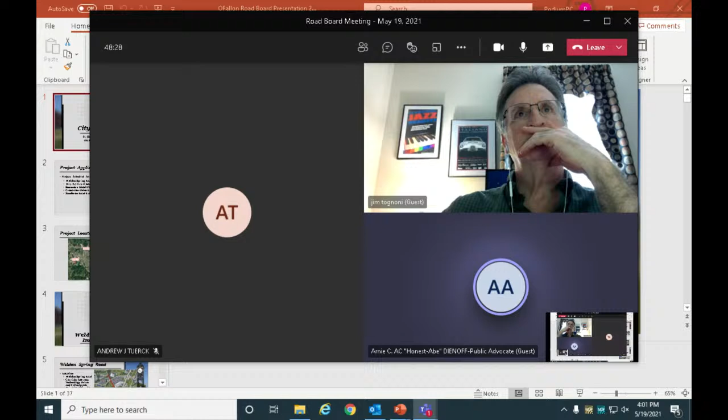And Mr. Dienoff is on the phone and should be able to speak. Yes, I can. Okay. Thank you very much, members of the Road Board. My name is Arnie. I'm a public advocate. And I just want to go through a few issues. One with the current project and the second one with some of the presentations this afternoon.

The first one I'd like to bring up to the Road Board is Missouri Highway N and East Road Construction Realignment Project. I'm not sure the scope of that project is actually being followed. The contractor has broken up the pavement, but has left the pavement there broken up and has basically kept the job. There's questions about workmanship. There's been some pieces of new asphalt that are already popping up.

It's dangerous as the subcontractor has left it. It's down to very narrow lanes and bad striping methods have been used. Someone should be very concerned from the county and from MoDOT. We should be embarrassed by the conduct and the lack of work quality by the contractor. And I would ask members of the road board to ask some questions and look into this issue.

The next issue is the city of O'Fallon, who will make a presentation this afternoon. I am in favor of correcting and making the safety improvements to Weldon Spring Road curve. This should be a joint project, not only the city of O'Fallon, but also the city of Dardenne Prairie, and also the unincorporated county department of highways. This really has been neglected and really needs to be fixed because of the influx of residential developments.

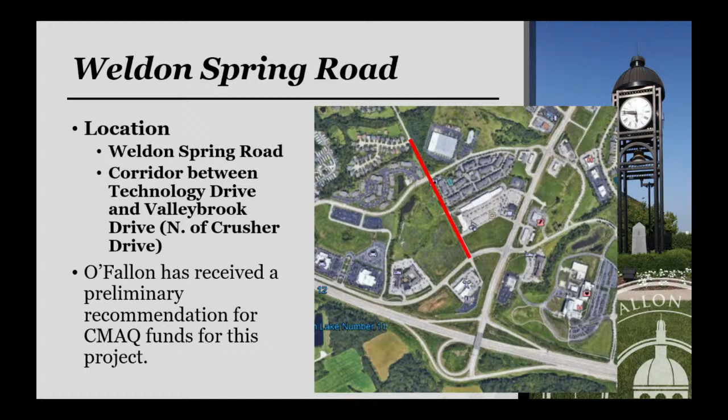Just as an aside, we have applied for and have received preliminary approval for CMAQ funds for this project as well. But essentially, there's a high-density residential development that's going to be occurring on the corner of this particular roadway.

We anticipate that further development will take place shortly thereafter once this comes in, and that's going to increase the traffic loads on this roadway. The existing roadway is in kind of a deteriorated condition, and the existing sidewalk is not in compliance with some ADA standards. It also just kind of stops in the middle of nowhere.

So what we'd like to do is basically install a new 3-lane, 39-foot wide concrete pavement cross-section and adjusted profile for this stretch of roadway. Install a new roundabout at the intersection of Crusher and Weldon Spring Road, and then make some improvements to the pedestrian system, extend those sidewalks, and basically make a complete system so that residents in the area can then access some of the commercial spaces there along Highway K near Highway 40. And last would be to install high-visibility crosswalks where applicable.

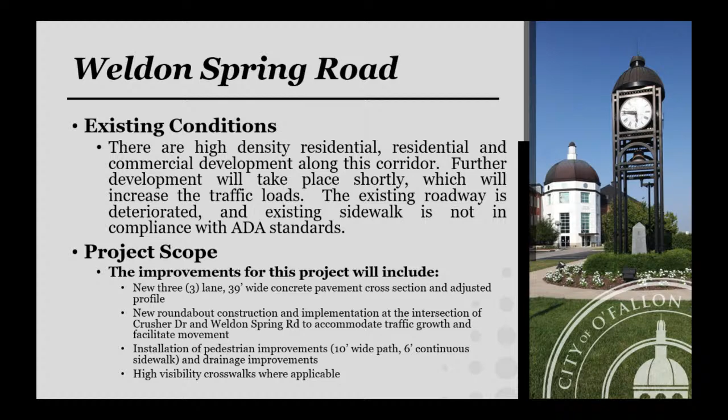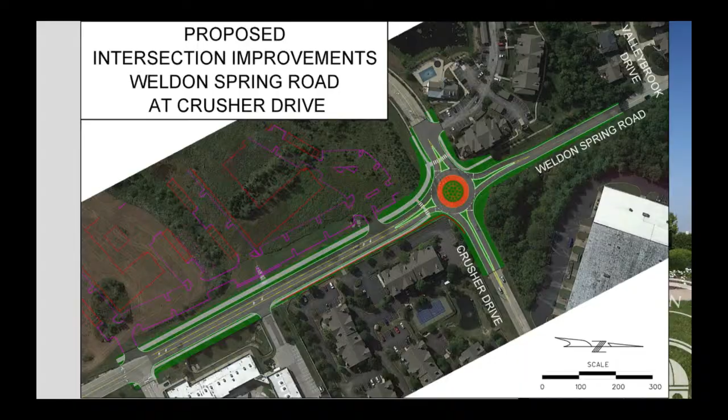How high is the density there? It's several apartment buildings. I don't recall exactly how many new residents it would be, but it's high-density residential. It's not single-family developments. Again, here is just another concept plan for the developer.

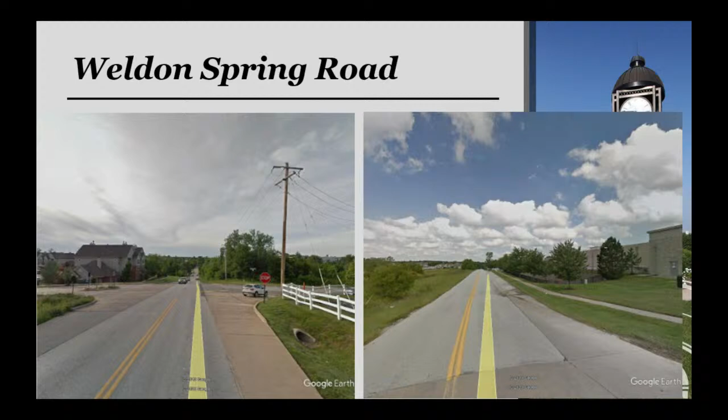Here are some pictures of the roadway, so you can see it kind of transitions from concrete to asphalt, and it's kind of broken up in places. The sidewalk just kind of stops, just kind of a disjointed little intersection, and right now it's stop controlled. And again, as more and more traffic gets placed on that roadway, we can see where that congestion is only going to get worse and worse.

So in terms of funding, we are looking at around $2.66 million for this. Again, we have CMAQ funds that were going to be appropriated for this project as well. We have preliminary approval for that. And basically that accounts for 39.19%. With CMAQ, there were some limitations on the entire project of what could and couldn't be funded. We got the maximum amount of this project funded as possible with CMAQ. We are asking that, between the county and city, we basically make up the difference of those funds. But there's a summary of that.

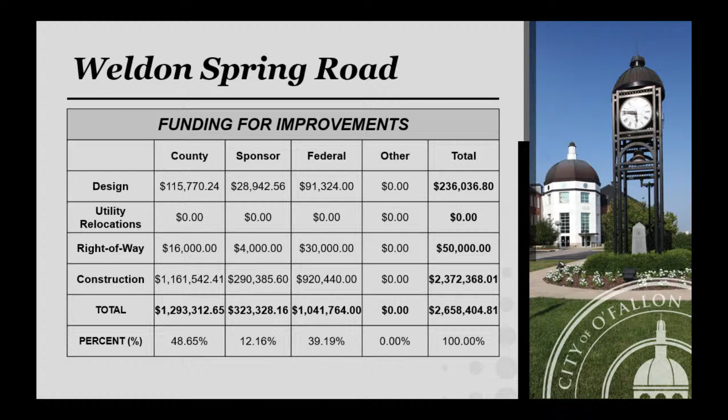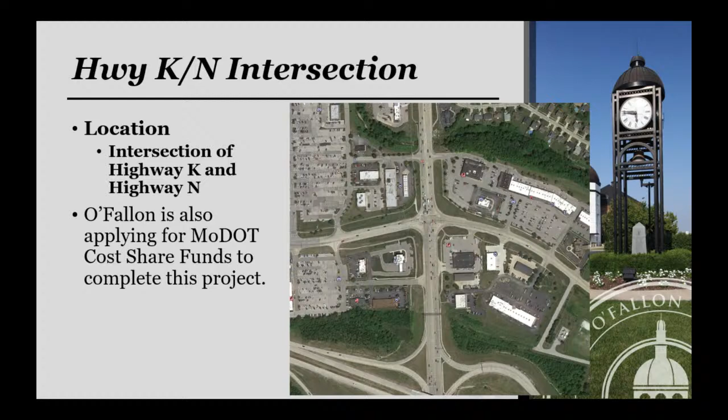The second project is the Highway K and Highway N intersection improvements project. So we have applied for MoDOT cost share funds on this. I've submitted an application. I think the next cost share meeting is in July, maybe? I think that's right. So got a little bit to go, but we have applied for additional funds for this as well. This project would be centered around, obviously, the intersection of Highway N and Highway K. If anybody has driven through that area, it is a nightmare on most days.

We completed a citywide traffic study back in 2018, and this, along with the Highway K 364 intersection, were basically the two lowest performing intersections in the city in terms of level of service. High level of delay in the morning and in the afternoon. Traffic backs up pretty substantially.

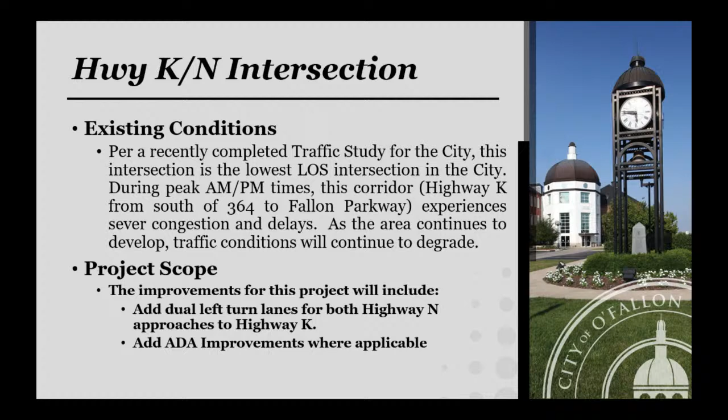So, in speaking with MoDOT, because obviously Highway K, Highway N, and 364 are on the MoDOT system, what we came up with as a sort of coordinated effort would be to add dual left turn lanes for both Highway N approaches onto Highway K, and then also add some ADA improvements where applicable. And here is kind of a concept plan for this.

The idea behind this is that between the 364 interchange and the Highway N interchange, obviously there's a lot of straight through movement on both of those. There isn't a ton that we can do to the 364 interchange. However, the Highway N interchange is starting to see more and more traffic, especially coming westbound and turning. And right now there's only single dedicated left turn lanes.

So the idea here is that by adding dual left turn lanes on both approaches, you can get more cars in the turning movement while keeping the turning movement timing the same, and then potentially expanding the straight-through movement to help move more traffic in the straight-through movement, which is currently the issue. So, like I said, in a joint effort, that's one of the concepts that we came up with, and we're pursuing that as a project.

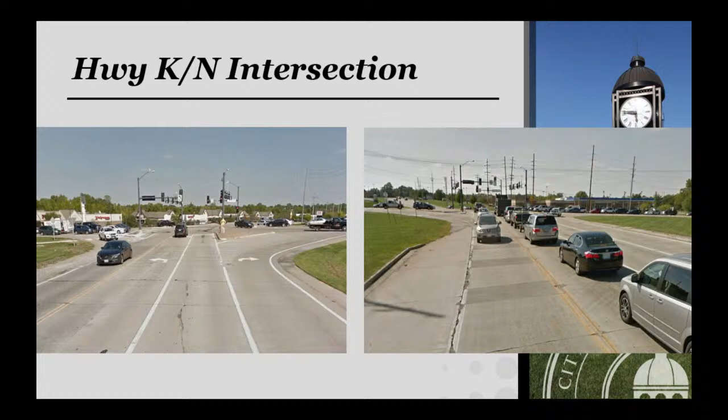So, again, here you can see some photos of it. AM, PM, peak hours, it's an absolute nightmare to get through there. So, it is a $1.3 million project.

We have applied for 50% cost share funds through MoDOT, and then we are looking for an 80-20 split of the remaining 50%, or a 40-10 split between the county and city to do this project.

Third project is the Sommers Road widening. So this is Sommers Road between Highway N and Highway DD. And what we have is Sommers Road is essentially a 3-lane road starting at Highway N and coming down to Discovery Ridge Elementary School. At that point, it necks down to 2 lanes and then goes down, and actually the City of O'Fallon just completed a project to install a signalized intersection at the Sommers Road and Highway DD intersection.

As part of that, we widened it out to 3 lanes because there's a dedicated left turn lane. However, there's going to be this little portion of about 400 feet where it's going to be 2 lanes. So it's going to go 3 lanes down to 2 lanes for about 400 feet and then widen back out to 3 lanes. We also have a development that's going to be coming in on the northwest corner there, the Sommerline development. They're going to be making improvements as part of it, but basically, as a result of where their improvements lie, there's still a 400 feet gap.

So what this project would seek to do would be to widen that remaining portion of Sommers Road out to 3 lanes, so it's 3 lanes the entire way from Highway N down to Highway DD. Along with that, there are some sidewalks that kind of stop and start along that route that need to be filled in, so that, again, there's 3 schools within half mile of each other. So it's very important to get that pedestrian facility completed. That way, all of those homes and all those residents in that area can use those, kids can walk to school, et cetera.

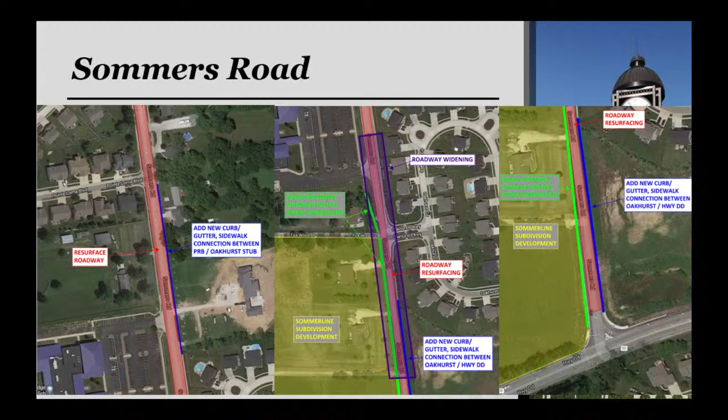So we'd like to resurface the roadway, add some sidewalk in some places, widen the road for that 400 feet stretch so it doesn't kind of neck down and go back out to 3 lanes, and basically just make some general improvements to the area. So this, we estimate, is a $1.7 million project, and we are looking for an 80-20 split between the county and the city to do this project.

On that one, what is the breakdown if you eliminated the resurfacing of the other road other than that 400 feet? I would have to go back and check. I apologize. I believe there's an estimate that was included with this that itemizes those items, but I don't have it in front of me, but I can get that information for you if you would like. What do you think's driving that right-of-way cost? It doesn't seem like you're really impacting that 400 feet as far as expanding the road, or?

So, yes, there would be some right-of-way costs associated with, just to the north of that Sommerline development, in between that and Discovery Ridge Elementary School, there's 2 properties that we would have to get a decent amount of right-of-way for to expand the road to 3 lanes. Also on the other side, you could potentially expand it in both directions, but then you're going to be getting into people's front yards and backyards. So we put that in. It may not be that bad, and there's also going to be a lot of easements to do the sidewalk work and everything else. So it's an estimate.

It may not come to that, but during the Highway DD and Sommers Road signalization intersection project, there was, how do I put this politely? There was a lot of disagreement about the right-of-way on that particular project, and we had to go to condemnation, and it didn't go so well. So we just want to make sure it's there just in case. Is your Sommerline development contributing any right-of-way or funding for this? Yes, they would be. They would be doing improvements to their side of the roadway as well as, I believe, contributing some right-of-way.

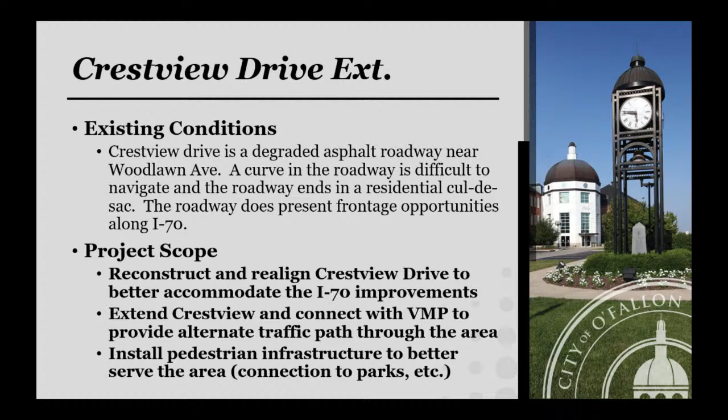And then again, also install some pedestrian infrastructure to better serve the area. Fort Zumwalt Park is right in the area. It would be nice for us to be able to connect a sidewalk because it does serve quite a few residents in the area as well. Here's a concept plan, so you can see it makes this real awkward, more than 90-degree turn, kind of a hairpin turn there around the corner. Again, it services a few commercial properties and then turns another 90 and then dead ends in that current cul-de-sac. This would extend that to the west and then eventually make a connection with Veterans Memorial via roundabout. We would also be installing sidewalks and everything else along with that.

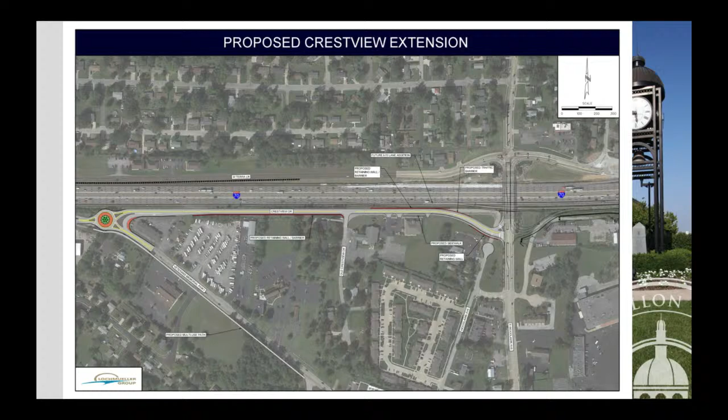And then this would also make a better, more direct connection with Woodlawn, which would hopefully help to better serve some of the improvements to I-70 that are going on in that same area. So this would be what we are proposing to do. Again, here's the old TikTok shop. I believe it's been torn down for a little bit, but again, the road's not in great condition. It is not necessarily very well used at this point, but we feel with the realignment, it could become a viable alternative to help traffic move through the area and onto the I-70 system a little bit quicker than what they currently have to do.

So for design and right-of-way, we currently estimate this to be about $620,000. And we are looking for an 80-20 split with the city and county again. Purely design and right-of-way at this point, no construction funds.

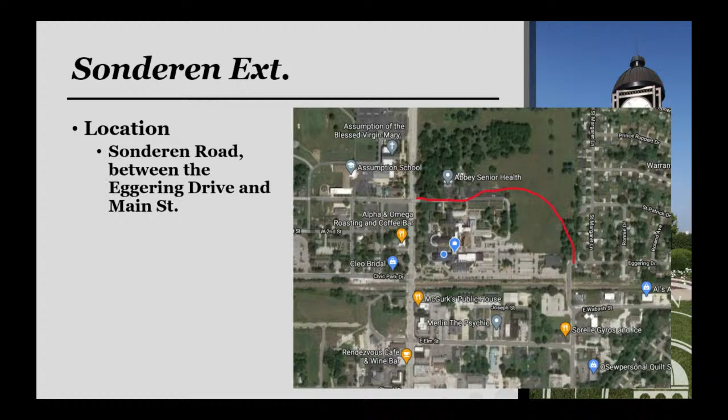And last but not least is the Sonderen Road extension. This would be extending Sonderen Road where it currently terminates at Eggering Drive and making a connection onto Main Street at the Main and 3rd Street intersection. There is a development that is planned in the area. It is the old Sisters property, and that is going to be coming in as a mixture of high-density, single-family residential, commercial, and a few other things. It's a very large development, and it's going to put a lot of traffic in the area. So we believe that this necessitates a connection between Sonderen and Main Street. We hope that it allows for greater connectivity, and we'd like to see Sonderen become a better utilized street as kind of a sister to Main Street through the area.

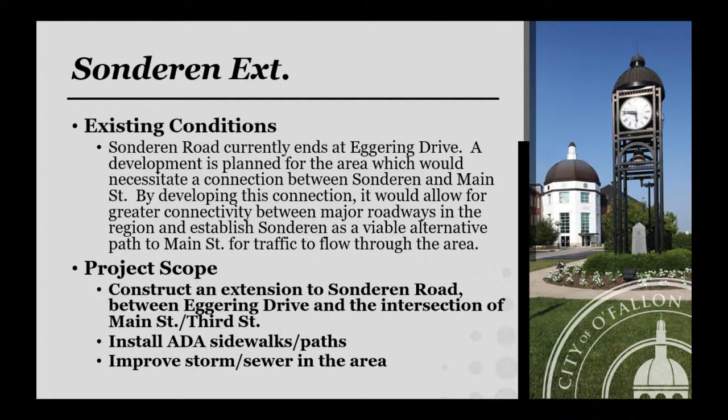So what we would want to do is construct an extension to Sonderen Road between Eggering Drive and the intersection of Main, and install ADA sidewalks and paths. We have a 10-foot path on one side, a 6-foot path on the other, and then also improve some storm and sewer in the area. So again, this is a concept plan. Where Sonderen currently terminates is on the bottom right, and then the intersection with Main Street would be on the middle left, and you can see what's going to happen.

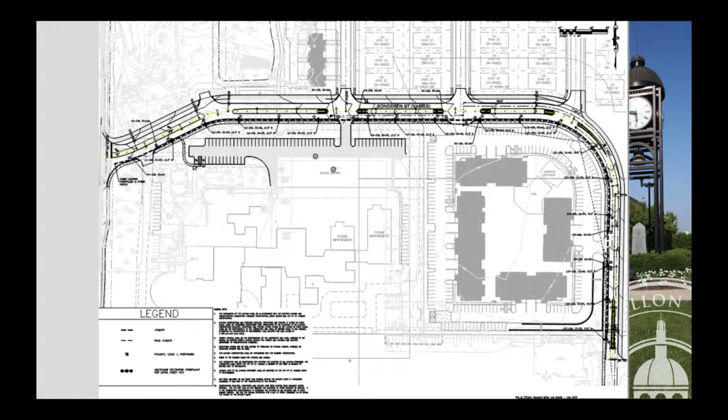So we have some high-density apartment-style residential dwellings that would be constructed on that corner where it rounds, and then you'd have more residential development up on the top, as well as some new commercial frontage along Main Street. The existing Sisters property essentially stays in place. There are some modifications to it, but for the most part, it remains untouched in terms of still maintaining its senior care and everything else associated with that facility. So again, here's where it currently terminates. We would go directly north from this and then around the bend and then eventually make the connection out onto Main Street.

We do have, again, as part of a development, kind of a partner in this one with a developer. They will be putting up the funds for design and donating the right-of-way. What we are essentially asking with this is to split the construction costs, 55% county, 10% city, 35% developer. You can see what the total percentages are if you factor in the design and the right-of-way that the developer is taking care of. We estimate this to be about a $2.7 million project at this point in time.

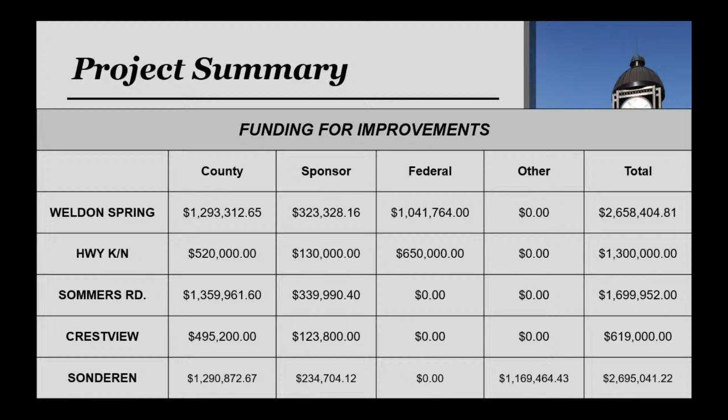So here is a summary of the funding that we are looking for in terms of the county, the city, and the other agencies. Again, we have two, hopefully, federal partners on 2 projects and then a developer on the Sonderen project contributing additional funds.

How far along is the developer? Is it pretty much set in stone now for that property to develop, or is this still concept phase? Again, I'm not on the development side of things for the city, so I cannot speak to exactly how far the conversations are, but from what I gleaned, it's really far along to where it would be, I think, surprising if it fell through at this point. That's probably how I would answer that question, without being able to say for 100% certain, because I'm not a part of those conversations.

In terms of priority, what the city would view as its number one priority would be the Highway K, Highway N intersection improvements. Again, it's the worst performing intersection in the city. It affects almost 60,000 vehicles a day. So that is a huge priority for the city, to get that one performing better.

Second would be Weldon Spring Road. Again, we've preliminarily been approved for CMAQ funds for that project as well. Third would be the Sonderen Road extension. Fourth would be Crestview Drive design and right-of-way, and fifth would be the Sommers Road widening. And with that, I will take any questions you have.

I do. On the K and N section, has the Page extension relieved any of that at all, being able to get on and off there? When you say relieved, what do you mean? Well, I used to work over at K and N. I had an office over there, and it did back up quite a bit in the evening, especially. With the Page extension, people taking it and not necessarily having to go down Highway N, has that relieved any of that backup?

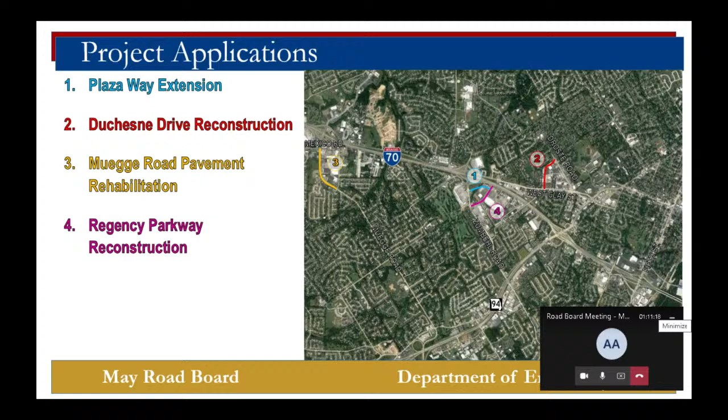All right. The City of St. Charles this year is applying for 4 different road projects. We recently received some great word that we were successful with federal funding on 2 of these 4 projects. For the Duchesne Drive Reconstruction, we received federal STP funds, and for the Muegge Road Pavement Rehabilitation Project, we also received federal funds. We'll get into that a little more on the specific project applications.

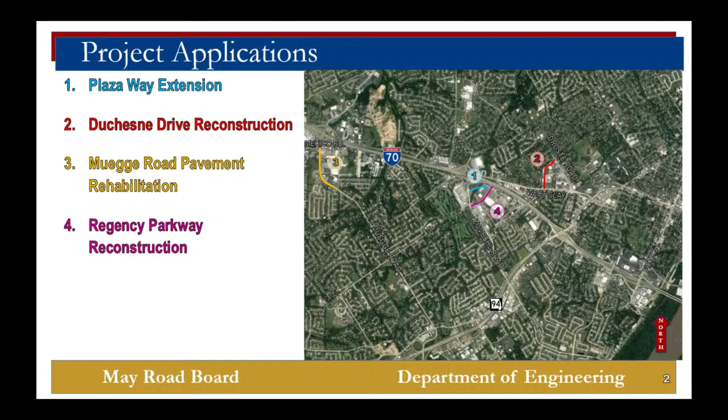But to jump right in, the first project that we have this year is the Plaza Way Extension. Every year, the City of St. Charles has a roadshow meeting where we try to highlight road projects and get feedback from the general public on what residents want to see. You'd think you'd see questions about roundabouts or other transportation stuff.

The most common question or comment that we get is, when is the City of St. Charles getting a Chick-fil-A? So we are happy to say that a Chick-fil-A is coming to the Red Roof Inn site. So if you've driven by the Red Roof Inn area, the Red Roof Inn is torn down at this point, and we are well underway towards laying out a site for a Chick-fil-A, Chipotle, and then one other retail tenant that we're really excited about, but probably not quite ready to release that information at this point.

This development, I should say, is really going to transform this corner. So right now, Red Roof Inn has some traffic, I guess, but it's really people that are going to Red Roof Inn, one trip in the evening, trip out the next morning. This development obviously generates a lot more traffic and really changes the way that the traveling public's going to access

the site. So we anticipate a huge amount of the residents that go to shop at Walmart or Schnucks or Sam's Club are going to be traveling over to the Chick-fil-A, and really just the general public to the east. And that's going to cause a lot more congestion to the Veterans Memorial Parkway signal up by Zumbehl and I-70. So with all that in mind, we've worked with the developer to come up with an alternative to connect the Plaza Way road across Cole Creek over to the Zumbehl Road signal to provide kind of a relief route cut through to keep from congesting that intersection and that interchange further.

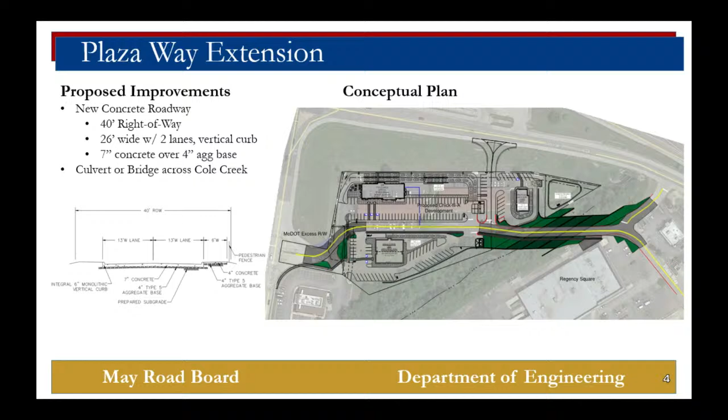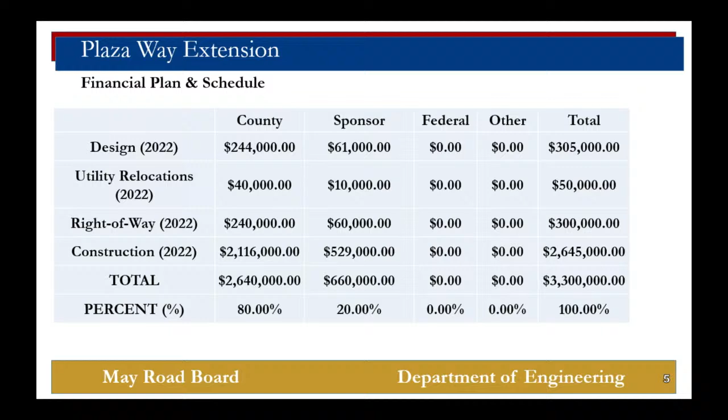This whole site is a huge revenue generator. So the projections that we're seeing for the site is over $12 million. So over $8 million just for the Chick-fil-A itself, which generates a ton of sales tax revenue. So this is a very impactful project for the city and for the county as well. The total project cost is $3.3 million for the Plaza Way Extension. And like I mentioned, most of that cost is in that bridge to get across Cole Creek. It's a fairly significant structure. The funding we have broken out is 80-20 between the county and city.

Where's the right-of-way coming? Yeah, let me go back. So, I may kind of go on this slide. So the right-of-way within the development, within the Chick-fil-A, Chipotle, and third lot, that right-of-way we're anticipating will be donated. That's not something that we budgeted for and wouldn't anticipate having to acquire. The two places we think there may be cost, I guess really the one place primarily, is over on this side of Plaza Way.

So there's currently a 40-foot wide ingress-egress easement from Regency all the way at basically the back of that commercial lot. That ingress-egress easement is not currently dedicated to the city. It's a private ingress-egress between like Popeyes, the Subway. I think there's a mattress store back there, a few other retail outlets, and we would be acquiring rights to convert that property to a public right-of-way all the way out to Regency.

To be quite honest with you, that estimate is fairly conservative for right-of-way. We would hope that the right-of-way isn't really going to cost that much, but we do know that there's some other factors at play there to make sure that we can really provide that public connectivity all the way through. I think it'll benefit them. Absolutely, totally agreed, yes.

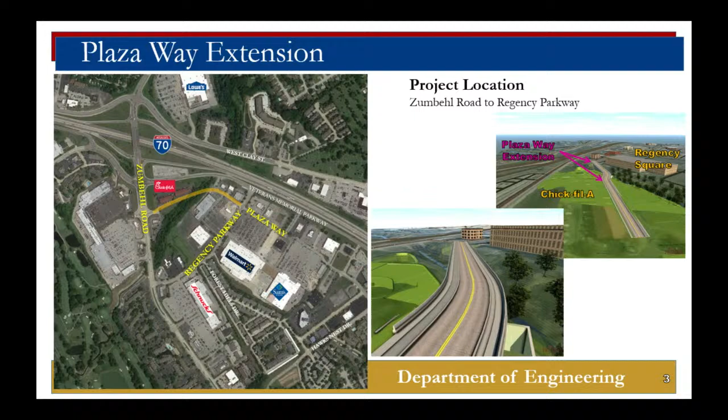Again, it seems like when you improve people and you gotta pay for it, it bristles me a little bit. I get the culvert, but it's expensive, and you're giving away 10 years' worth of sales tax to get this, but again, if you don't do something like that for Chick-fil-A, you're gonna have a mess anyway. Sooner or later, I mean, they get them through, but it's a beehive.

Yep, understood. I think, to your point, we're definitely hoping the right-of-way is going to be significantly less than what we budgeted, but we want to make sure that we have the funds available to get the project over the line. Are you looking at 3-year funding out for this? No, so the development is moving forward this year.

Figured that. Yeah, so we're planning to work with, we actually have several folks from the development team here. Premier is doing the engineering for the site, and they're actively designing the site as we speak. So our plan is to start design immediately for the roadway improvements as soon as we receive positive word on funding, and then implement the actual construction improvements in 2022. Any more questions before I go on that project?

Okay. The second project that we have this afternoon is the Duchesne Drive reconstruction. I don't know if anybody may know where Pundmann is along Duchesne Drive here. But anyway, this is kind of the last leg of the gray triangle, so to speak. There's been a little bit more activity recently in this area, and we're really excited about that. The city's done a lot of work on the other 2 legs of the triangle. We've just completed reconstruction of West Clay. We've completed reconstruction of Droste Road, and that's really given a facelift to the corridor. This is really the last piece, completing from West Clay Street all the way up to Droste Road.

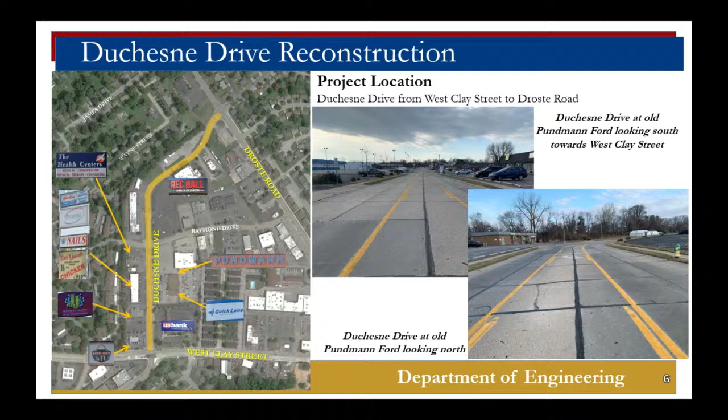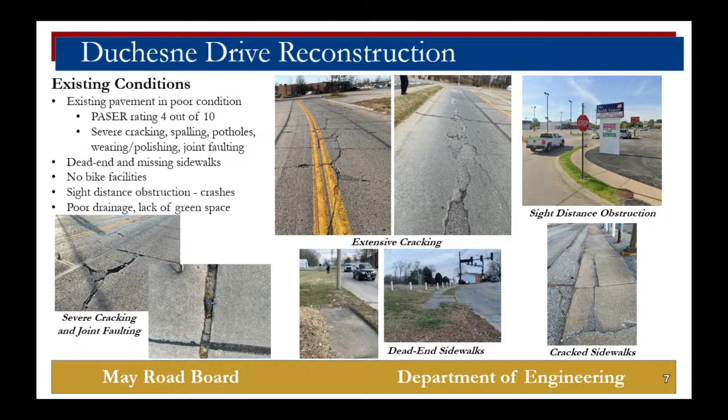Duchesne Drive reconstruction has several different components to it. Really, the corridor as a whole is set up a little bit odd. It's a major thoroughfare that people use as a cut through, but it was constructed with rolled curbs and kind of a character that doesn't really fit the classification of street that it is. So with the city project, we've identified that there's a lot of discontinuity for sidewalks. There are some pavement deficiencies, and the road section is probably not what we would like to see for that type of road.

So our proposed improvements would install a continuous shared use path along one side of the road and a continuous 5-foot sidewalk on the other side of the road to really help activate the pedestrian traffic through there. There's already a lot of pedestrian traffic. A lot of that's generated by Lindenwood, and we're hoping that adding these additional facilities is going to help alleviate some of the traffic and also some of the parking concerns that we're starting to hear about as the area starts to reactivate. We're hoping we can drive more people to walk and bike to these facilities.

The shared use path also completes the loop along with the road network. We have a shared use path on Droste and on West Clay, and that kind of completes the circuit there. On top of that, we're also installing some LED stop signs at Raymond Drive, doing quite a bit of storm sewer work along the road to help with some drainage issues that we've seen and help with some of the safety issues there at Raymond.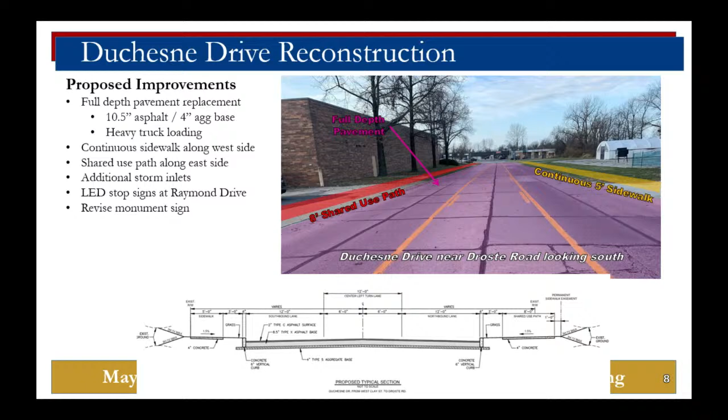Here's a conceptual plan that shows the improvements. You can see here what I'll call the east side. That's the location of the shared use path. There are some easements, some sidewalk easements that'll be required to fit the new section in.

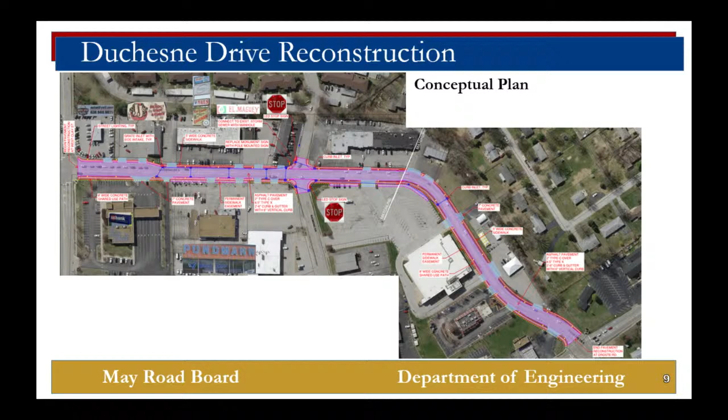It's something that we're going to work with property owners on, and thankfully the grades along here are not particularly difficult. So we think that the easements are going to be fairly low impact to property owners along the corridor. But that's definitely something that we'll work through in design and right-of-way.

As I mentioned, this was a project that we received federal STP funding for, so we're really excited about that. We received $3.4 million through the federal STP funding round. The total project is $4.2 million, and we would propose splitting the remaining 20%, 10% and 10% between city and county, for a total ask of $420,000.

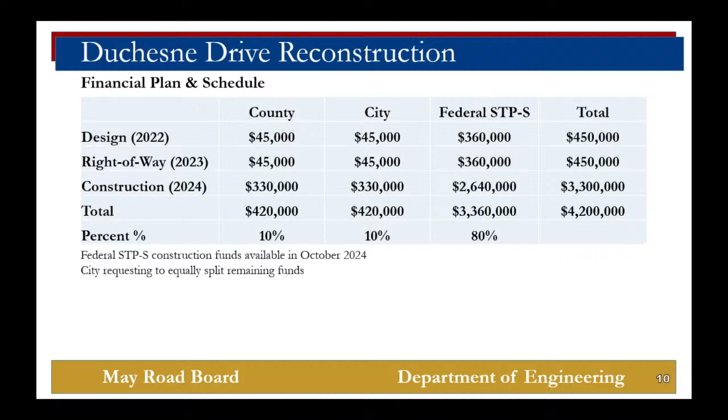The next project's Muegge Road Pavement Rehabilitation. I think Kirsten's going to talk through this one. Hi, everyone. I'm Kirsten Lawrence. I'm with the City of St. Charles also. I'm going to go over these other two projects with you.

This first one, Muegge Road Pavement Rehabilitation. It is located between Mexico Road and Old Muegge Road. Right now it's bound by several commercial developments, including Home Depot and Target, so a lot of traffic through here.

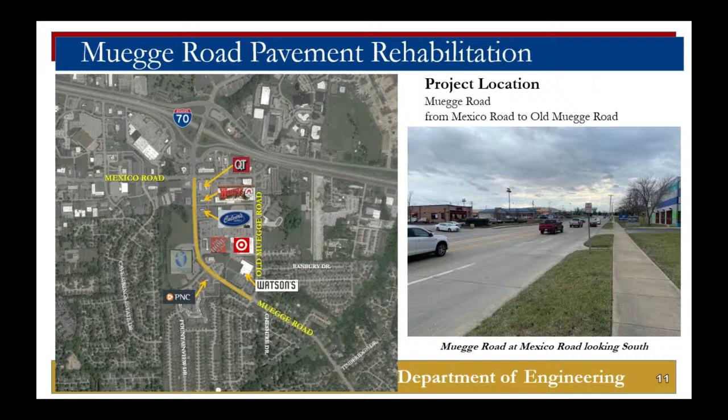We did the pavement evaluation of the existing pavement and determined that there were several slabs. We estimate about 20% of the pavement is in need of full depth replacement. It's beyond repair and needs some work. So we gave it an average rating of 4.7 out of 10.

A lot of those defects are coming from severe spalling of joints and cracks. We noted a couple areas where there were some broken curbs, a couple of broken sidewalks as well, causing safety issues.

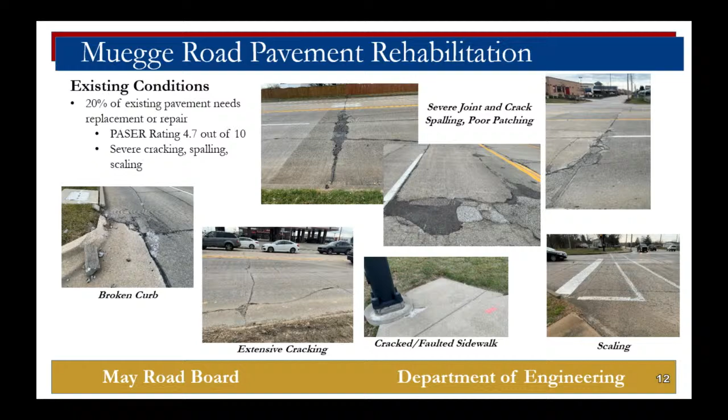What we're proposing to do is go through and evaluate all the slabs that need replacement. Like I said, we estimate about 20% of the pavement overall. Go through, replace those, and replace the inlaid reflectors that go between the lanes now. Come through and diamond grind everything smooth, and then seal the cracks and joints.

We'll also reconstruct the sidewalk on the west side. It's about 4 foot wide now. We'll reconstruct it with a 5 foot wide sidewalk, and then build a 10-foot shared use path on the east side, which will be continuing from an existing shared use path that's already there for a portion of it, which I'll show you on the next slide.

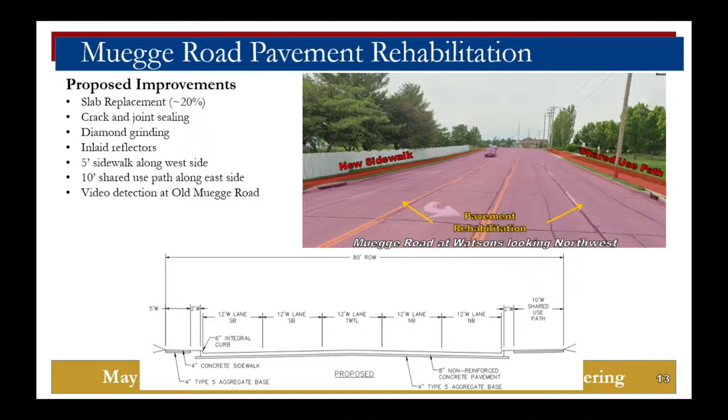Here, you can see, if I can make this work, there's already a shared use path on this side that goes from Mexico down to about this rear Home Depot entrance, so we'll extend that shared use path down to the southern limits of the project. And again, as I mentioned, on the west side, 5 foot sidewalk.

Those red squares are our preliminary estimate of the areas that need to be replaced. We're also showing an underdrain at the low spot. I can't see it on here, but I think it's over here somewhere. That's to help correct some of the drainage issues that are causing some cracking of the slabs there.

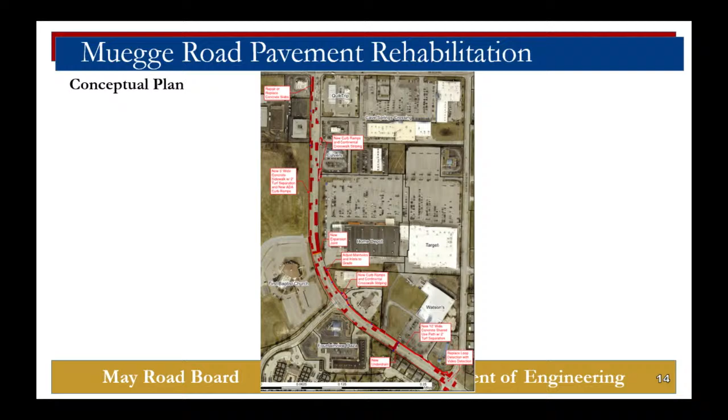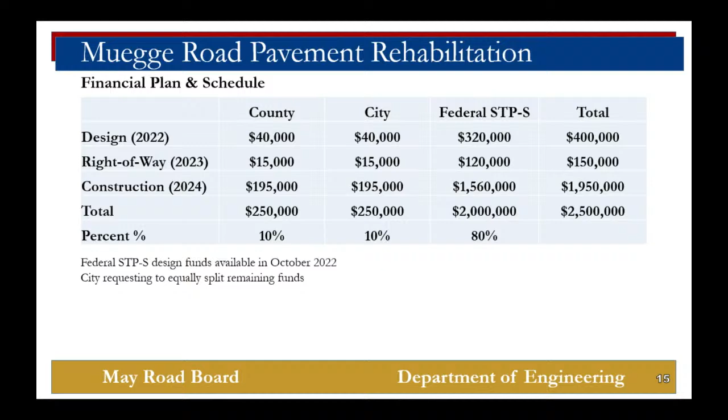The financial breakdown: as Dan mentioned, we got word that we received the federal funds from the STP program for 80% of the project. So right now we're asking for cost share with the county for the additional 20%, split half, 10 each.

The next project is Regency Parkway Reconstruction. This is located over by the Plaza Way project Dan talked about, south of 70 between Zumbehl and Veterans Memorial Parkway. You can see now it's a pretty wide section. It runs through this major commercial corridor.

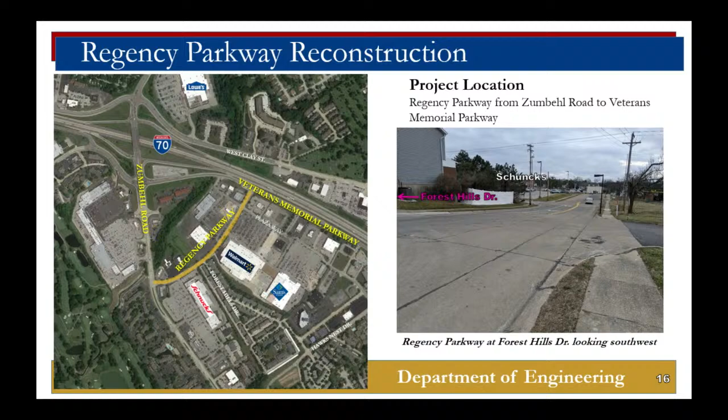And right now they have 2 lanes, one in either direction, with these intermittent turn lanes at some of the larger driveways. We evaluated the pavement. It was in pretty rough shape. There's a lot of potholes throughout. They had to do a lot of patching. The patching's failing. There's a lot of cracking everywhere.

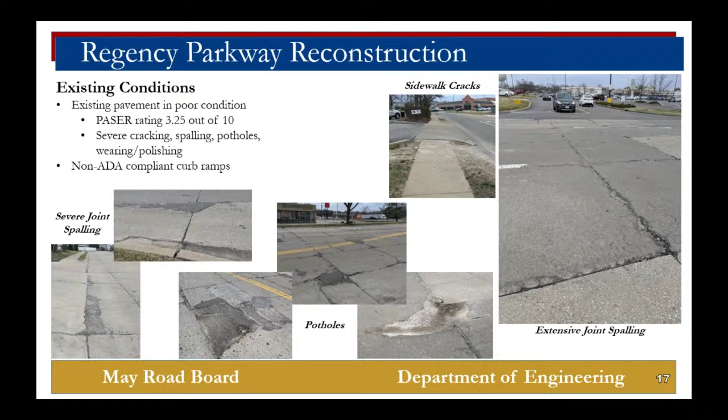We noted a lot of areas where there were non-ADA compliant curb ramps as well, some broken concrete sidewalks. You can see there's some off-tracking happening there, causing some issues with the concrete. So what we propose to do is replace all of the pavement full depth and put in a 9-inch section, to make it a little heavy duty for all the truck traffic that comes through here.

We're proposing to stay within the same right-of-way footprint, but reconfigure the roadway section a little bit. Right now, as I mentioned, it's 2 lanes, one in either direction. They're pretty wide, about 18 feet wide. So we're proposing to narrow the lanes down to 11 foot, one in either direction, with a continuous two-way turn lane along the whole reach.

We're also showing replacement of the sidewalks on either side. I think right now they're between 3 and 4 feet. We put 5-foot sidewalks on both sides, and we'll also add some crosswalk striping at some of the major entrances as well as the cross streets through there.

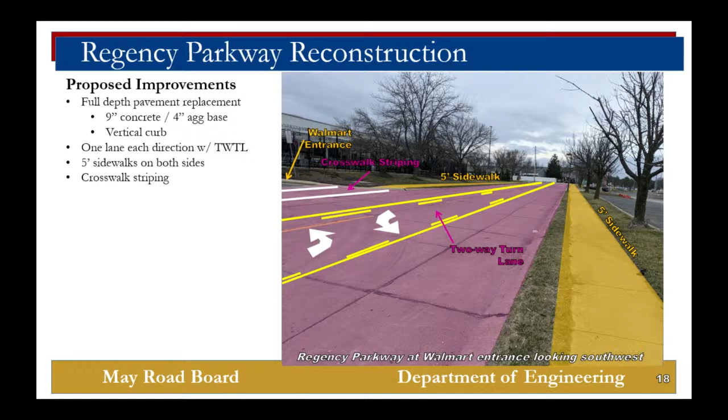This is just the same thing I just went over. You can see in the typical section here, we're staying in the same right-of-way footprint, but modifying the roadway section a little bit.

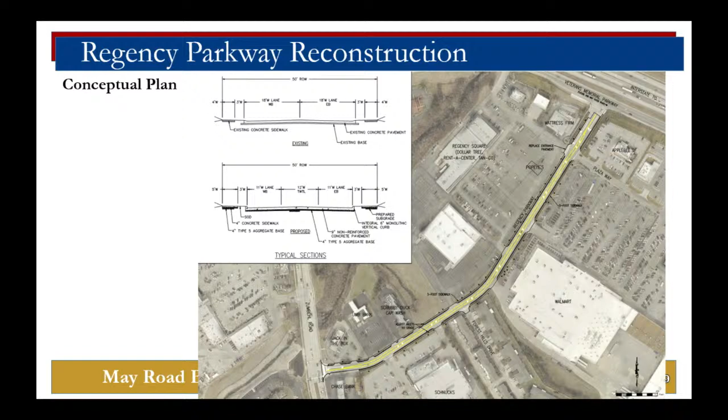We all are aware of these MoDOT I-70 improvements. I think Dan kind of already mentioned this too with the Plaza Way Extension. When that one-way outer road thing happens on VMP, we expect that Regency Parkway will be a little bit more significant in this commercial area, getting people back to the Zumbehl Road interchange.

So right now, there's several entrances into this development from VMP, and you can make a left to go to Zumbehl, but when that's not an option anymore, the next interchange to the east is over a mile away. So we anticipate that a lot more traffic will be traveling south to Zumbehl to get back to I-70 or to the overpass.

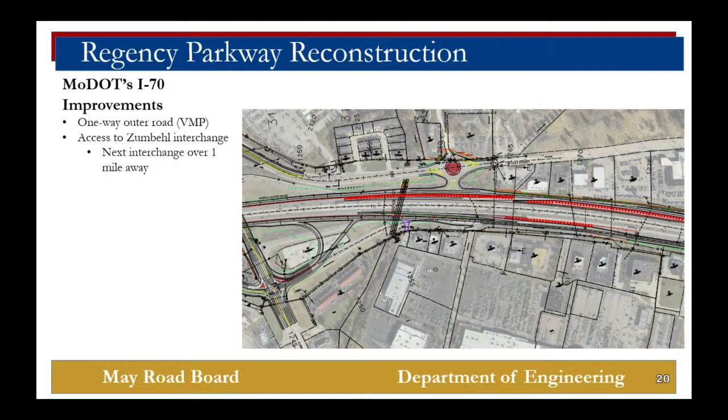This is the financial breakdown. This one, we didn't have the opportunity to apply for federal funds. It's not currently classified such that it's eligible, so we are proposing an 80-20 split with the county to fund this one. And we are also in the process of having it reclassified through East-West Gateway as a minor collector, so it would be eligible for federal funds in the future. But with the I-70 improvements expected to start as soon as next year, we wanted to get this in now. And with that, if you have any questions, that's all I've got.

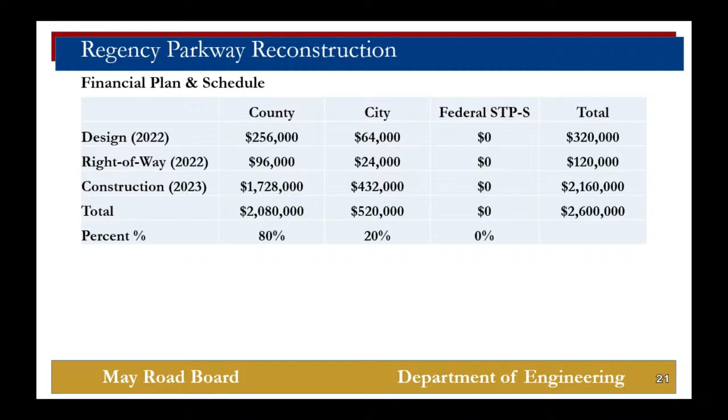So Muegge Road, is there any way that can be tied in with the expansion that's happening? Like in 2024 where it's going 6 lanes from Page Avenue to 70? I'm not familiar with that project. Do you guys know? That was voted on last time. We approved some money for the interchange. Oh, yeah, 94 is going to 6 lanes. I thought that was going continuous all the way to 70. 94 will, but that's not Muegge. No, 94 will, between 364 and 70. Okay.

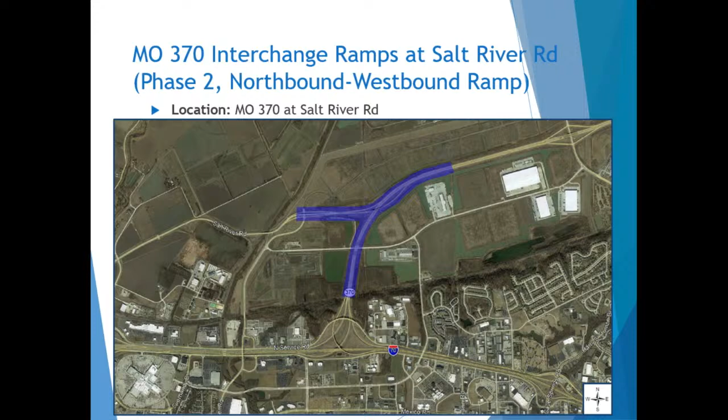This project is located right between I-70 and Truman. We've got quite a bit of commercial development in the area. This is the most up-to-date picture I could find, but it's still not quite up-to-date. We've got Medline going in here, filling in the empty spaces in the 370 Business Park. We've got an interested party working on these last 2 parcels. We've got an Amazon distribution facility, also known as Project Smile, super secretive. I spilled the beans, sorry. We've also got a developer putting together a plan for almost the rest of this area north of 370. So everything's really filling in.

We're going to have a lot more traffic in this area, a lot of truck traffic that we would like to get away from the Cave Springs interchange and the Mid Rivers interchange, and quite frankly, stop them from using this little road here, Executive, down to the outer road. It's not really designed for the trucks, and they're off tracking and tearing up the sides of the road.

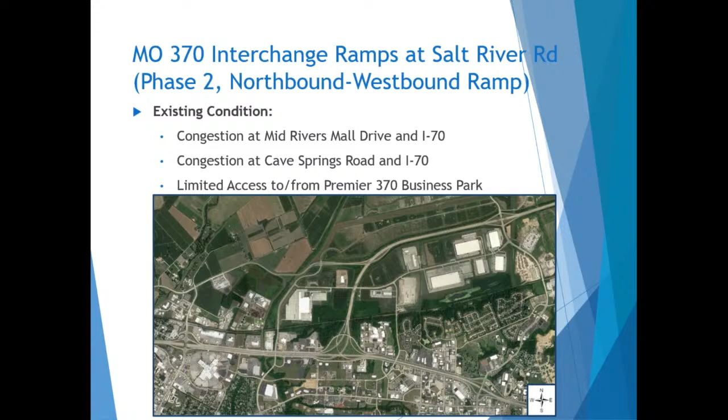So what we are looking to do is construct basically a flyover ramp from northbound 370 to westbound Salt River Road, which will greatly improve the access on the west end of this business park, as well as up to the new Amazon development to the north there.

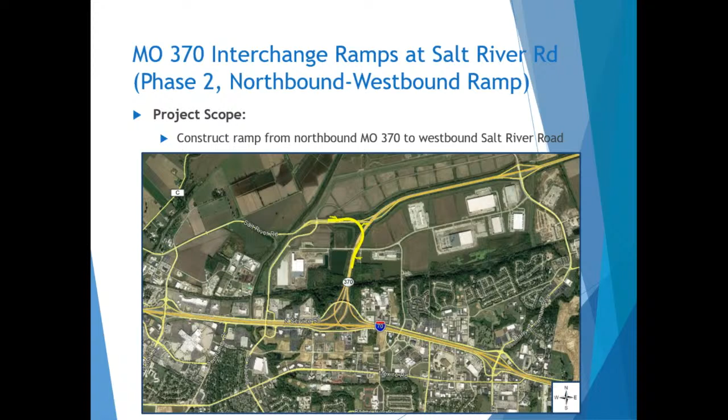With this project, it would require construction of a parallel bridge here over Premier Parkway, and 2 bridges over 370 and 1 over the Salt River Road current ramps. To go from 370 eastbound to Salt River westbound, you would have to go down through the Spencer signal and then back up.

So unfortunately, there's not enough room in there to allow the necessary weaving distance, so we had to make them go back down through that intersection and then back up again. And it'll be the same way for ramp 1 to come in the other direction, down through and then back up again. So nothing really surprising there.

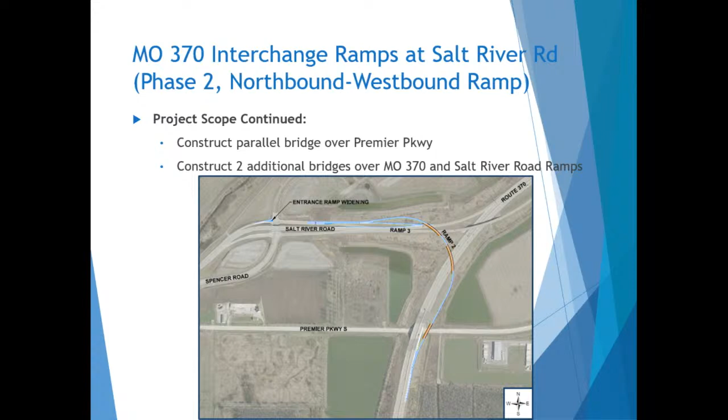Really, the overall idea of this is to improve utilization of the 370-70 interchange. Currently, very, very few vehicles are traveling from 370 westbound to 70 eastbound. They're not really using that ramp, and then vice versa, 70 westbound to 370 eastbound. So we think we could get a lot more use out of those ramps now with this new project.

Also, we want to reduce the overall congestion at both Mid Rivers and Cave Springs and I-70, as well as improve access to our business park, which in turn is a good revenue generator for the county and the city. And obviously promote additional economic development, although we're kind of running out of space there, so we can only promote so much.

So we were able to secure some MoDOT cost share funding, which you'll see is the other funding here, about $7.5 million. We've gone after federal funding, and we preliminarily were approved for about $2 million federal funding this round, and we're asking the county for about $3.4 million, and the city would provide the remaining about $900,000 for this piece.

The second project that we applied for this round was the Mid Rivers Mall Drive at St. Peters Howell Road lane improvements. This intersection is located along Mid Rivers Mall Drive between I-70 and 364. With every phase of 364 that was completed, more and more traffic has been brought to Mid Rivers Mall Drive. The intersection is just extremely busy. We've got nowhere to move signal timing to help out the side streets.

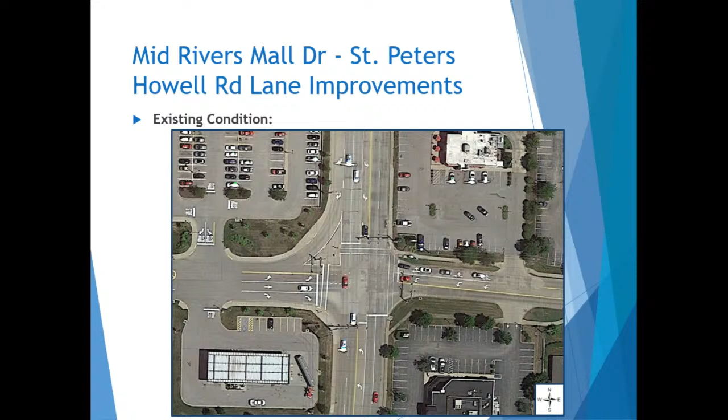Peters Howell. So with this project, we're proposing to add some additional lanes. We'd like to provide a dedicated left turn lane, a dedicated through lane, and a dedicated right turn lane to help folks be able to get going when there's somebody waiting to go through to Walmart, as well as to make the right turn when someone's waiting to go through on Mid Rivers Mall Drive.

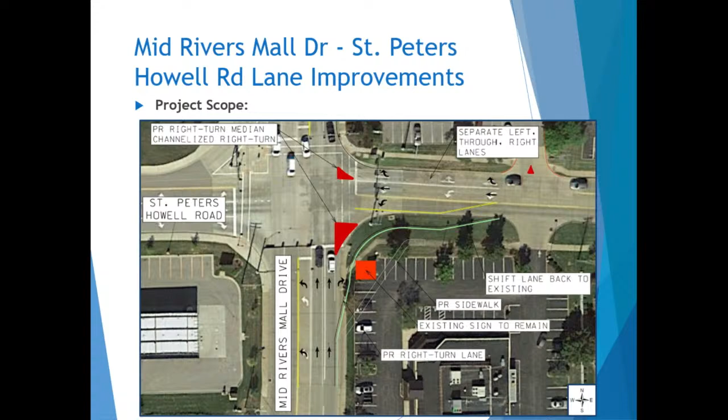And by providing these extra lanes, we'll be able to reallocate some time and give some more time back to Mid Rivers Mall Drive and help increase traffic flow on Mid Rivers. So like I said, we hope to increase the capacity of the intersection, reduce some queuing on both northbound and westbound, as well as reduce the delay for both of those movements and just overall signal operation.

So, originally we had applied for an 80-20 split. We were recommended for federal funding for this project, so we're going to reduce that ask to 80% federal funding and 80% of the remaining from the road board and 4% city funding. And our funding priorities would obviously be 370 Salt River, number 1, and then St. Peters Howell Mid Rivers, number 2. So, any questions?

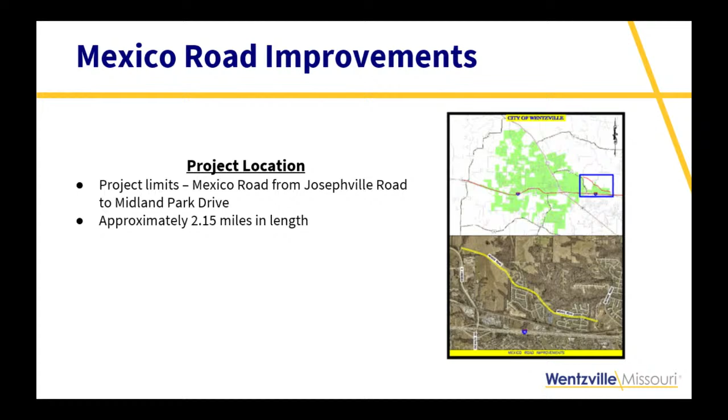The existing conditions out on this segment of Mexico Road are 2 lanes, 11-foot wide, no shoulders. The drop-off is somewhat abrupt in some locations, and there are grassy swales immediately adjacent to the pavement edge. We have had some complaints from the residents that live out there about the types of accidents that are occurring, which include coming off the roadway, and those are the types of accidents that the residents are most concerned about. There's also some intersection sight distance issues at Midland Park Drive. I can show that to you a little bit further into the presentation.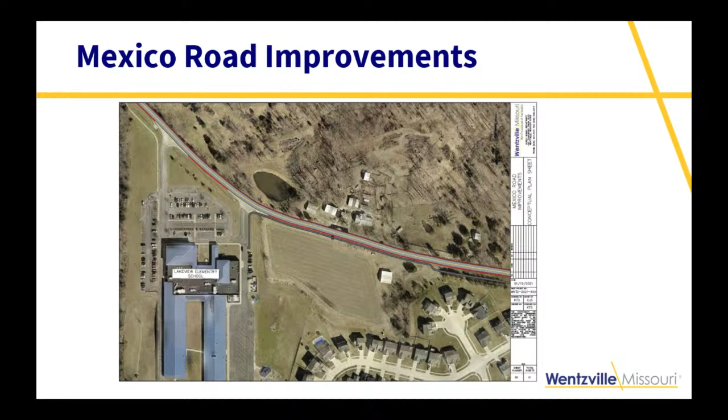as you continue to move east, you'll see this is the segment where it belongs to the city of Wentzville, and there is a fair amount of residential development. There's also a school. This is an elementary school that you can see there on the south side of the road that generates a fair amount of traffic during school. And this is the intersection where we've had a fair amount of concerns from residents, actually on both sides of the street, about sight distance.

So they're also wanting pedestrian access across the street. So that's the particular location where we're looking at sight distance improvements, a pedestrian crossing, perhaps in the future, or possibly as part of this project, depending on the costs, a signalization to solve the sight distance issues at that particular location. And then the project comes down to Midland Business Park and ends just east of Guthrie Road.

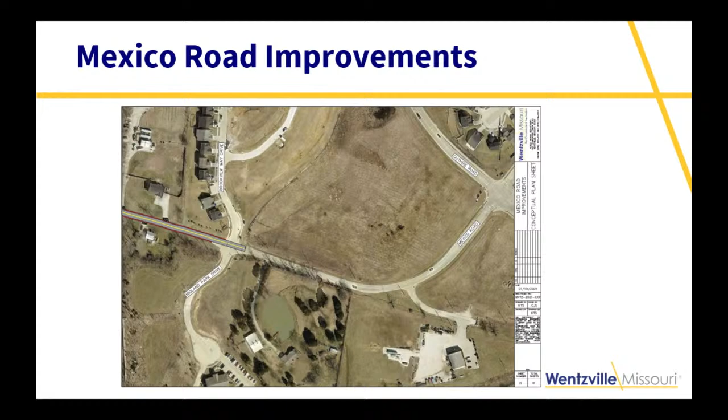So the financial plan, we have applied for federal STP dollars. 1.8 million will take care of 36% of the project. The remainder that we're proposing is 51% from St. Charles County and 12.8% from the city of Wentzville. The total project cost is currently estimated at $5 million. Were there any questions on that before I move to the next project?

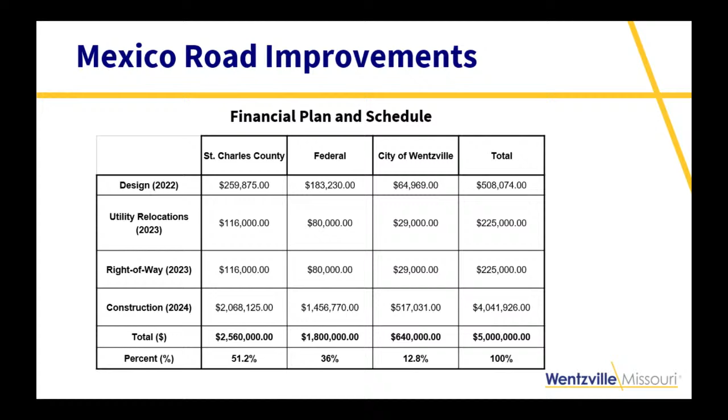Okay, so our second project is Route Z widening and signalization. You may recall that we've been before the board talking to you previously about intersection improvements at Route Z and Interstate Drive. This particular project location starts at Interstate Drive and continues south to Perry Cate Boulevard. It doesn't go all the way down to N, but it's on the way to N. It's a primary arterial that will continue to serve regional travel from Highway N north and south to I-70.

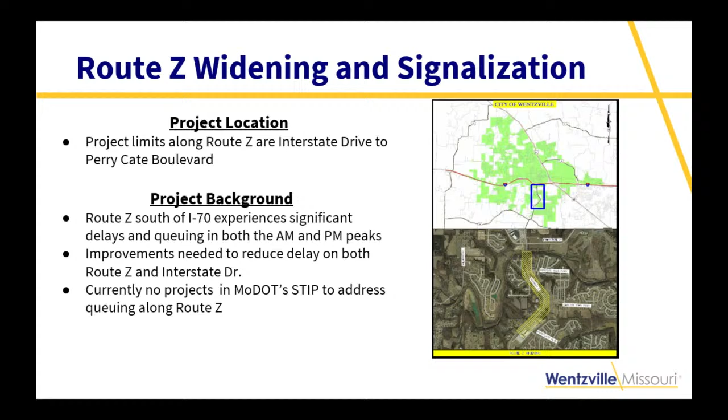What we're experiencing, and we've been experiencing for some time, is a fair amount of queuing, particularly during the AM and PM peaks. Peruque Hills Parkway and Peruque Ridge Boulevard is a pair of subdivisions that are operating at a level of service F, along with Carlton Glen Parkway, which also operates at a level of service F. And the queues in the traffic, we are regularly getting phone calls from residents about the delay that they're facing on a daily basis.

We've worked with MoDOT as much as we can to maximize and optimize the signal operation there at Interstate and Z, but there's just really no other way to solve the congestion except to add lanes. So that is what we're proposing, is to widen Route Z from a 2-lane to a 4-lane roadway with turn lanes at those key intersections.

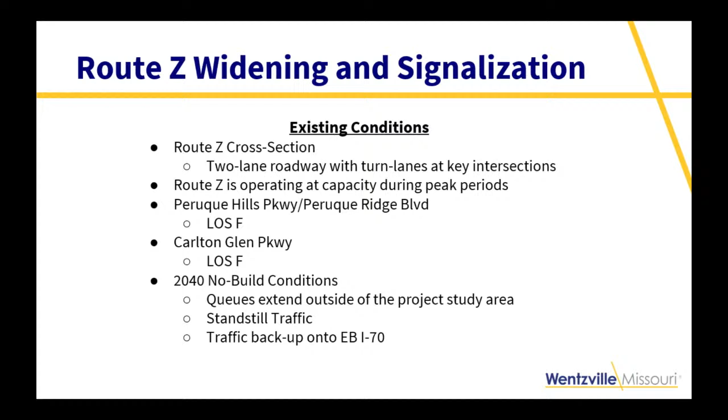So in working with MoDOT, we have been able to acquire agreement for a combination of cost share dollars as well as MoDOT maintenance dollars for the bridge that would be involved in being widened. MoDOT is recommending full replacement of this pavement because of its condition, and as well full replacement of the bridge superstructure. The project also includes a traffic signal there at Peruque Hills Parkway and Peruque Ridge Boulevard, and it will include a multi-use trail from Interstate Drive also up to Peruque Hills Parkway.

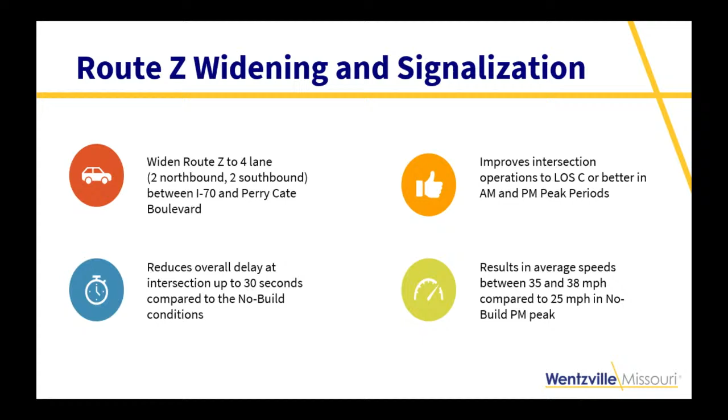Sorry about that, I should have had that slide up for you. So kind of a summary, we feel like it's going to reduce overall delay at the intersection by up to 30 seconds compared to not building, takes the intersection operation to level of service C, results in much greater average speeds compared to the no build, particularly PM peak condition.

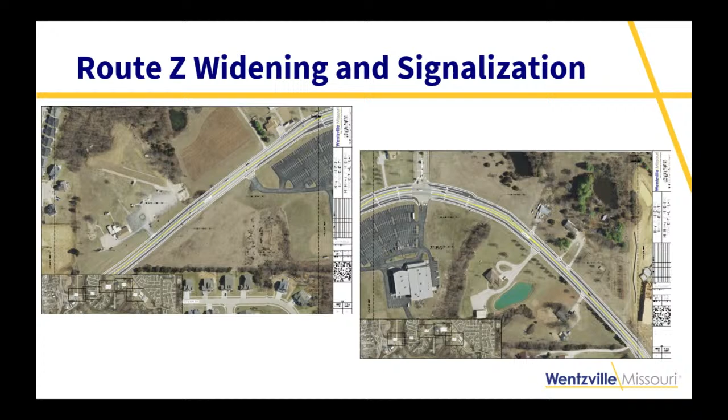So getting some bike trail connectivity down Z to those first two subdivisions is something that we want to try to do with this particular project. So you can see that there in white on those drawings. And then as we continue further south along Highway Z, that's the intersection there at Carlton Glen on the right, which is a fairly large subdivision. I would say Carlton Glen and the development of subdivisions on the east side of the road is approximately 200 homes. There's also a church out there, a VFW.

And then as you continue down the road, here at Perry Cate Boulevard, in the not too distant past, they've built a brand new public elementary school, as well as a private elementary school. It's called the Morgan School, and a senior living facility. So there's a tremendous amount of traffic that has been introduced onto this roadway.

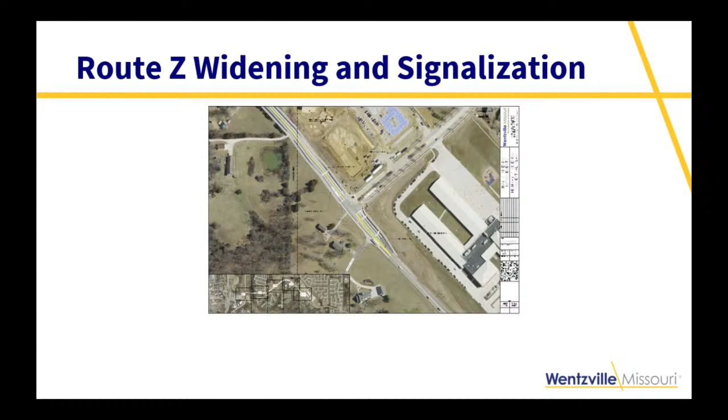There's absolutely still room for additional development, particularly down at the intersection of Z and Interstate Drive. There's a lot of undeveloped land that continues to be of interest to developers, and we think will, to some degree, generate sales tax revenue. There's a strong interest by a car wash, another gas station, those types of things. So we do see it as a good regional project because of the fact that it ultimately connects to Route N and will move a lot of traffic regionally as well.

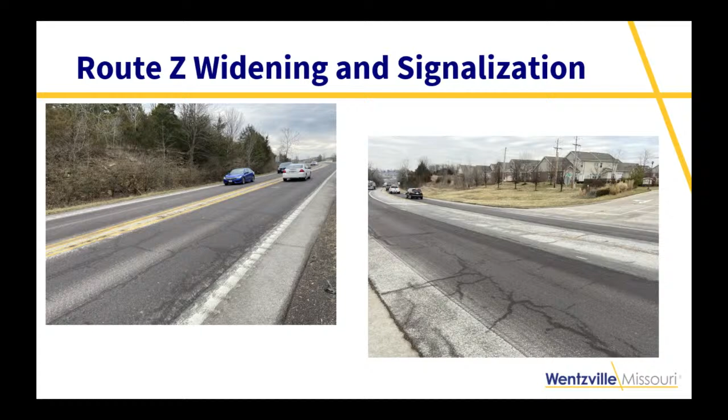I am looking for the financial plan. Here we go. So the plan that we're proposing, as you can see, it does have some MoDOT cost share in there in the amount of $4 million, MoDOT maintenance funds in the amount of $1.7 million, and then the remaining amount of $4.8 million is split equally between St. Charles County and the city of Wentzville, each agency participating 22.8%. Total project is estimated at $10.5 million. And I'll take any questions if you have any.

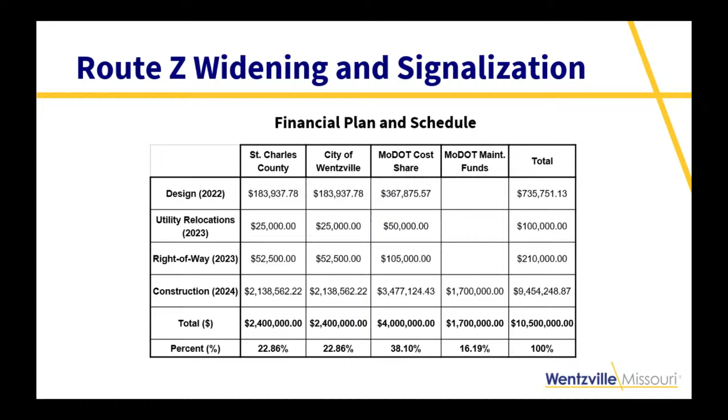The section of Z doesn't belong to the state? I'm sorry? I thought Z was part of the state. Highway Z is a MoDOT road. That is one of the reasons why it was eligible for MoDOT cost share dollars. Okay. MoDOT, under its most recent tax condition, they did recently get a fuel tax increase, but they were not willing to fund or able to fund any capacity improvements, which is what this is considered. So would Wentzville take over the maintenance of that section of the road? That's actually a very good question. I'm kind of glad that you asked that one.

There was a time when MoDOT was asking us to take over Route Z, but because of the fact that it is a lettered route, we're much more comfortable taking over their outer roads, which is something that I think has been established as a policy for several communities. When you step into the cost share realm with MoDOT, they're always wanting to find a piece of road for you to take over for them. In this particular case, the $4 million and the $1.7 million is resulting in 8 miles of outer road on the outer west end of Wentzville on both sides of I-70 being transferred from MoDOT to the city.

Parts of that road are still in the county, so there will be 8 miles of roadway there. Compared to adding 2.4 lane miles on Z, we'll be picking up 8 miles of roadway that'll have to be maintained. We'll be back looking for additional county funds and have to spend additional city dollars in the future maintaining those roads. But that's how it is with MoDOT cost share money right now.